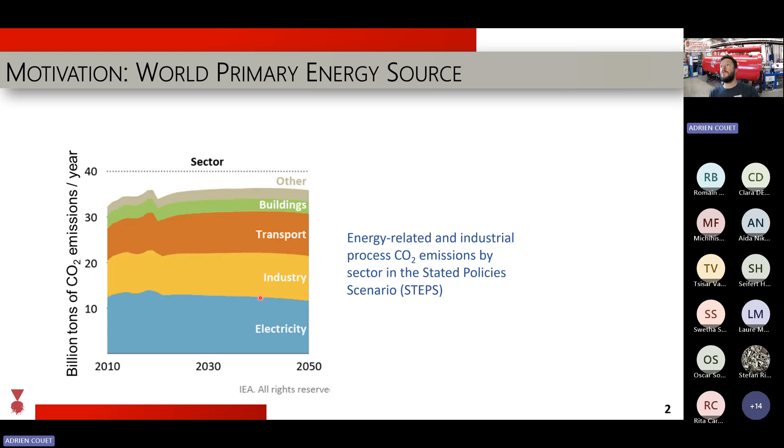With this, the problem is that if you look at electricity production in the world today, it does not seem to follow a decarbonization trend. Clearly the plans - again, this is an IEA report, it's a little older, this one is from 2018, so right before COVID - but honestly, this has not changed a lot.

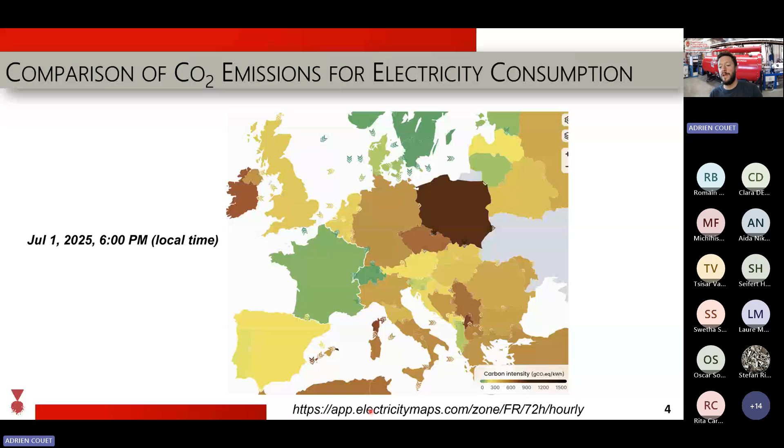If you look closely at France, for instance, France has a strong nuclear capacity. At 6 p.m. on July 1st, it was using about 2/3 of its capacity, about 40 gigawatts, a bit of solar, a bit of hydro. At the end of the day, the carbon intensity is extremely low - 93% is low carbon. That's a pretty good picture if you want to decarbonize electricity.

The neighbor Germany, at the same time, has no more nuclear. They have significant solar capacity - 100 gigawatts - and an extraordinary wind capacity of 70 gigawatts.

But at 6 p.m. that day, maybe the sun was already setting or something, because clearly not much of that capacity was being used. So coal and gas had to come up to take their part, which is why the carbon intensity is about an order of magnitude higher in Germany than in France.

And if you move a little further east to Poland, that's clearly an even more dire picture, where the carbon intensity is about double that of Germany.

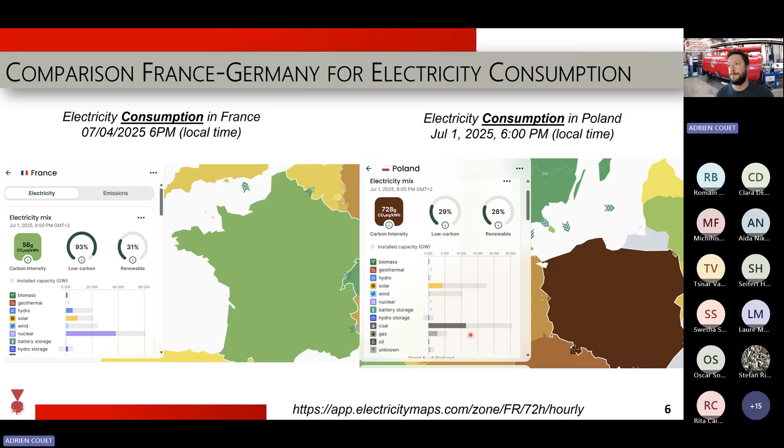The solar and the wind, again, probably the same weather as in Germany at this time. It was not used very much, and most of the electricity came from coal and gas. As a professor, I like to put grades, and that's more or less the grades of CO2 production for different countries in Europe.

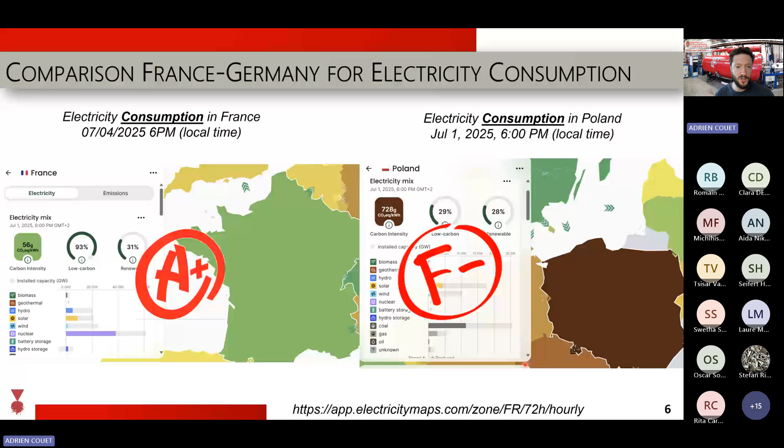So, how can we decarbonize electricity production? As I showed, nuclear is one of the paths, one of the really important means to do this.

If you look at the US over the past 10 years or so, this is a 2015 picture, taken from Third Way, a bipartisan lobby in Washington DC, you see we have an interest in using light water reactors. Those are going to be used for many decades. We're going to build new ones, whether in France, the US, and so on. New ones are being built and will be built because we know how that works, we know how to make them relatively efficient, and we have lots of experimental knowledge about those.

But they're also very expensive, and they may not fit every single country in the world. So small modular reactors are meant to be about 50 to 70 megawatts, and those can help smaller communities, smaller countries, or industries like mining to get energy on site, rather than relying on diesel generators.

And then, of course, there are those advanced reactors that we've probably heard about for many years by now, which are a little more than paper reactors today, thankfully. There are many companies and startups looking into those. While clearly this is not going to happen before 2030, there has been significant advancement globally on the design and development of those advanced nuclear reactors.

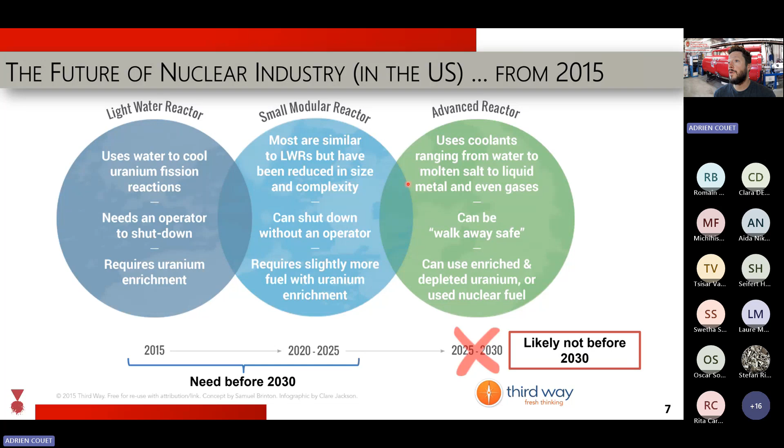All right, so let's take a look at the materials now. Materials are one of the main limitations to the development of those advanced nuclear technologies. This is a well-known plot, published in 2009, where you have temperature on the left-hand side and DPA. DPA is displacement damage, a means to quantify irradiation damage in materials.

If you look at 1 DPA, which seems relatively low on this scale, it means that every single atom in your material has moved on average 1 time from its lattice site, which is a lot when you think about it. If that really happened, the material would just vaporize and be blasted, nothing left. Thankfully, that's not what's happening in a reactor, because most of those defects, most atoms that have been displaced, go back to their original site or a similar site very quickly, so the defects don't have a very long lifetime. Thanks to this recombination of defects, you don't form a lot of defects and you don't vaporize your material just with 1 DPA.

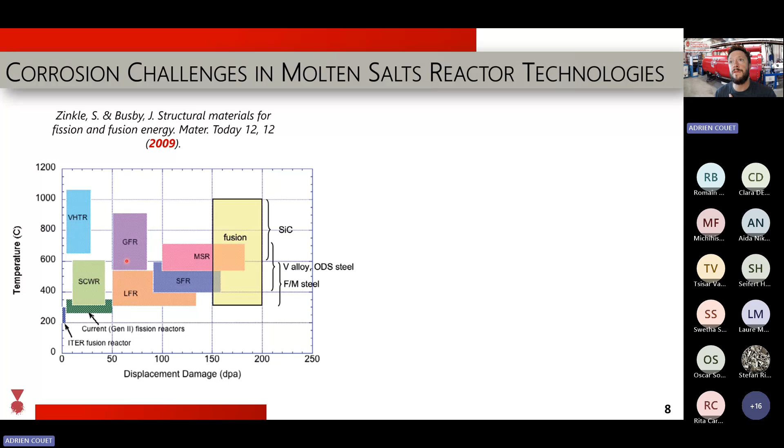So in this plot, you may recognize some acronyms. We are here interested in the molten salt reactor right there. But interestingly, you don't see corrosion in this plot. That's because only 10 years later, the same group of people realized that corrosion is another aspect, not only temperature and irradiation damage, that limits the deployment of materials for reactors. If you look at this relative corrosion susceptibility, it's very qualitative, but you realize that the molten salt reactor, in addition to the lead-fast reactor, are the two reactors with the most detrimental type of corrosion degradation out there.

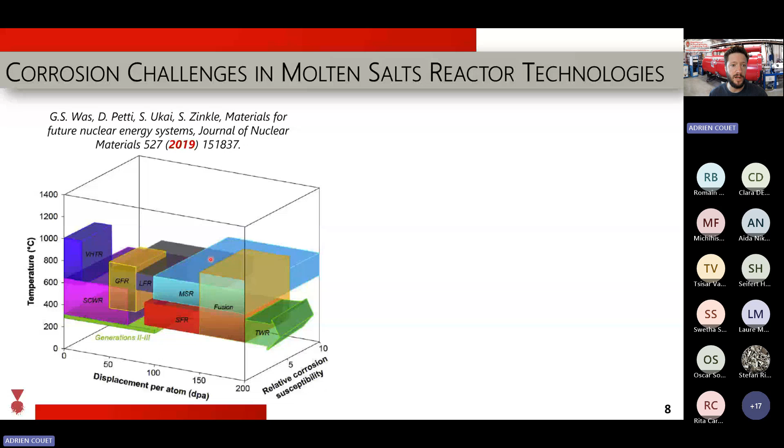If you want to develop a lead-fast reactor or molten salt reactor, you have to think about corrosion very, very seriously. Even though the people that developed those plots or graphs were professors at different universities, there are also big picture people out there, like Bill Gates, who is also aware that material science is one, if not the most, important challenge for advanced nuclear technologies.

Here is an MIT Q&A. It's a little old, but Bill Gates is still co-leading TerraPower, a company he helped fund a while ago, developing advanced nuclear technologies. Material science is one of the largest problems, according to him.

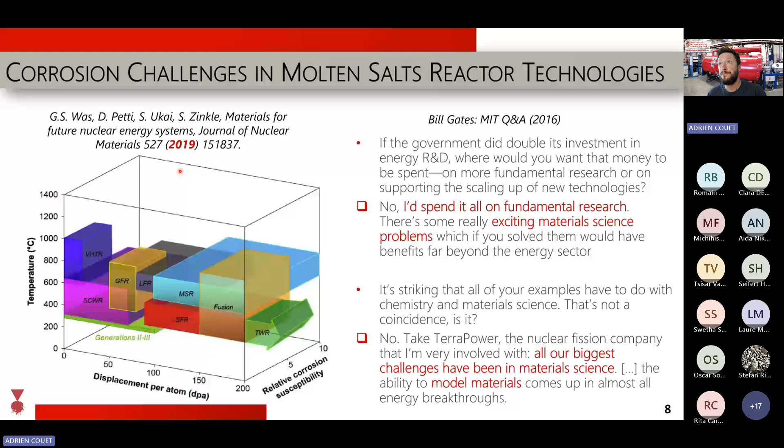All right, let's take a look at molten salt a little more closely, at how materials corrode in it. It's a thermodynamic process first, so you need a driving force for this to happen. For corrosion to happen, you need to look at two main physical quantities. One is the partial pressure of your alloying salt - fluorine or chlorine, denoted X here since it could be either. If this partial pressure of fluorine or chlorine in your salt is larger than the free energy of formation of your metal chloride or metal fluoride by a few tens of kilojoules per mole, then you will have this driving force leading to corrosion of your material.

How this usually happens is that ions in the salt react with your material to form metal chlorides, and since those dissolve in the salt, you form vacancies at the interface. Those vacancies can disappear either through surface roughness - increasing surface area and energy - or you inject vacancies into the material. If you inject vacancies, that means you have chemical transport: the vacancies diffuse via atoms, and those atoms diffuse in the opposite direction of the vacancies, so you end up with a depletion profile of your alloying element M in your system.

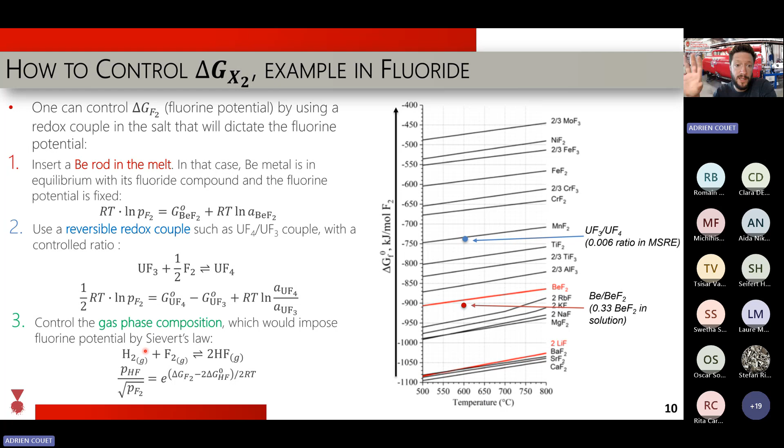Another way to do it, although not very much used in real applications, is to control the partial pressure of your gases in the overhead gas. If you do so, you can control the partial pressure of fluorine in the gas in equilibrium with the partial pressure of fluorine in the salt, achieving a redox condition again. So if you control the HF/H2 ratio in your overhead gas, you decide where you want this point to be, and you can be more or less oxidizing.

All right, so that's cool, but not very much, because that would be way too easy, right? Controlling this redox buffer is extremely complicated. If you're familiar with PWR or LWR corrosion, there are very strict redox potential boundaries for water. We inject hydrogen gas to very strict levels to control that redox, and even so, we have corrosion issues in the core of reactors out there. So even if you do the best you can with the chemistry, you're not going to get there, which means you need to develop materials to also sustain corrosion.

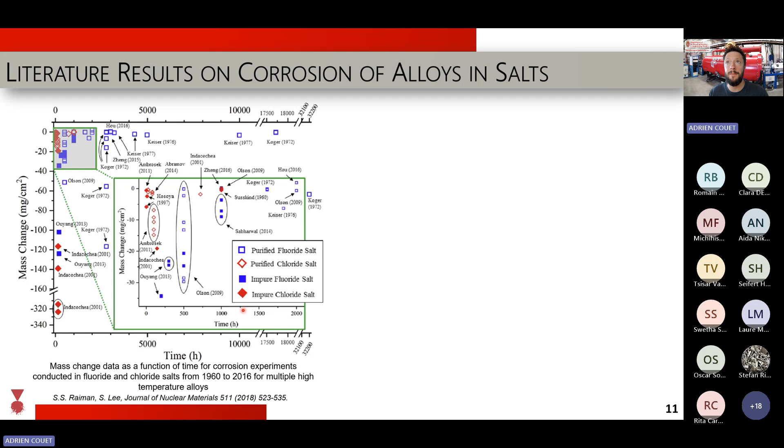Then you look at all the corrosion tests people have done in the literature. Here's a plot that shows mass loss, because your material dissolves in the salt, as a function of time, and you see this is all over the place - so many different data points everywhere. You can't really make anything out of this, right? So that's a bit of a problem, because that means you have a lot of 'mice in the house' - lots of issues here.

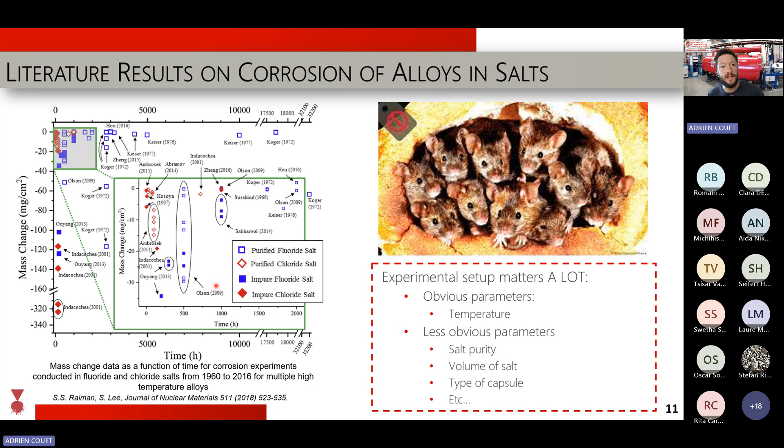Some of these issues are relatively obvious. In this plot, the temperature isn't always the same - there's some variation, but not a lot. Then there are other parameters, like salt purity, and so on. One thing you can see in this plot is that usually impure salt - the filled symbols - shows a higher weight loss than pure salt. So purity of the salt really matters.

First, HF will react with all the oxide particles in your salt - if you put HF in there, they're going to become fluorides, so the oxides decompose to fluoride. Then it's a question of reducing those fluorides. So you bubble H2 to reduce those fluorides to metal, and then you just have to sieve the salt to remove those metal particles, which have very low solubility in the salt.

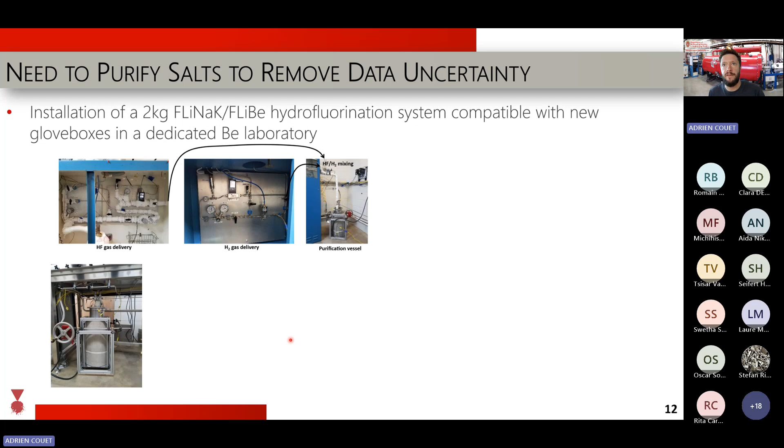So that works pretty well. Here's an example - you work in a glove box because salt loves water or oxygen, so you don't want any oxygen or water ingress in your environment, otherwise it gets very mushy and viscous, so you don't want that. What you see here is basically a 600 degree Celsius water-type thing - it looks like water, but it's very hot, and it behaves like water in terms of heat capacity and all that. It's relatively close, so it's super interesting for thermohydraulics to have a fluid that's like water but at 600 degrees Celsius and above.

So that's how you retrieve your salt from the purification vessel in a glove box.

We have more data now on this, and we have a paper in preparation to show the effect of purification on corrosion kinetics. For 316 stainless steel, we see approximately a factor of 2 lower weight loss when working with purified salt. So purification of salt is really very important.

The main impurity driving corrosion, as we found out, are oxygen-bearing impurities, mostly moisture, which could create HF in your salt as one of the responsible agents. So how does that look?

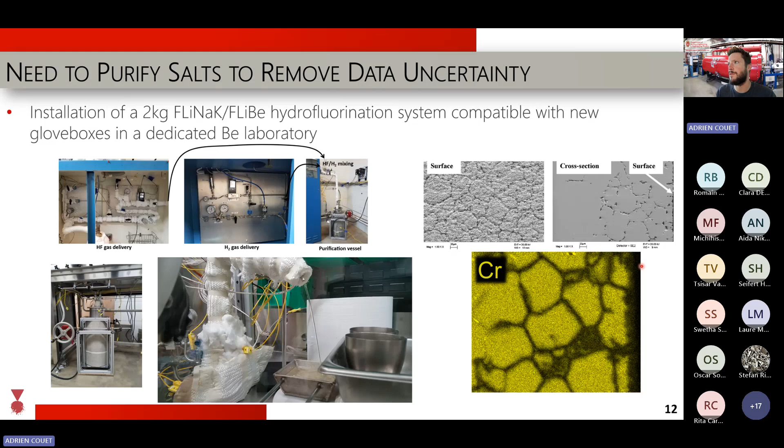Well, it's dissolution of chromium from the grain boundaries. It's a well-known effect—chromium fluoride is very stable, like chromium oxide, but it dissolves in the salt. So you have this dissolution path: you're losing chromium from the grain and grain boundaries, and you see weakening of the grain boundaries because of that. This is a well-known observation for chromium-bearing materials in molten salts.

Another thing we looked at briefly is galvanic corrosion. If we put very noble elements with a 316 stainless steel capsule around them, with electrical contact between them in the same media, we would expect the stainless steel to be severely oxidized, and the coupon of nickel, copper, and moly to be well protected against corrosion. If we put an insulator instead, we would expect galvanic corrosion not to occur.

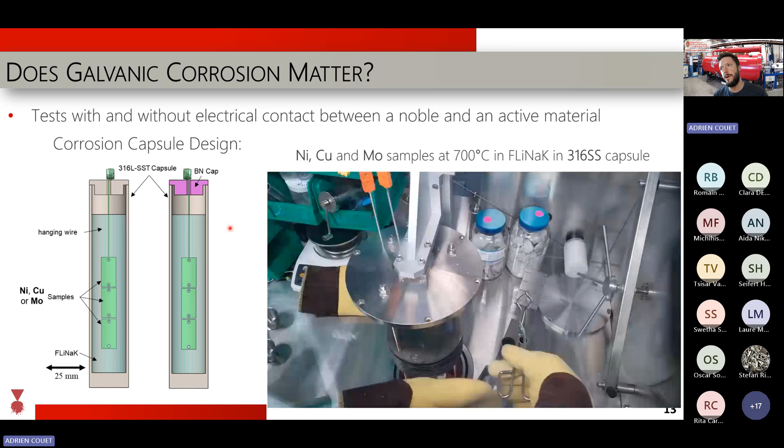So this is the kind of test we do. This is in a glove box—we have a well, a furnace around the well, and then we take those capsules out of the glove box. Here you can see the nitride caps preventing electrical contact, and the stainless steel caps that remain electrically connected.

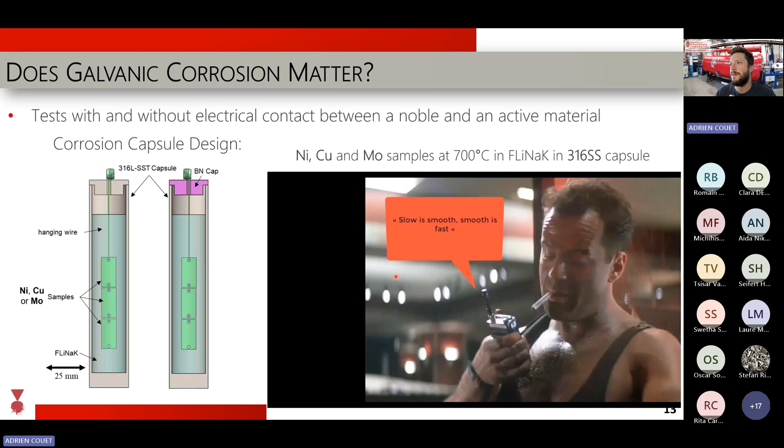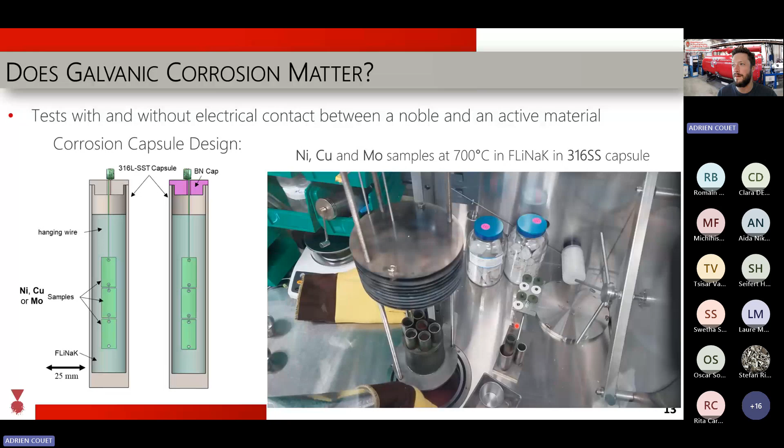So we take those samples out—it's very hot in there, about 700 degrees Celsius, so you've got to know what you're doing. The salt is still liquid, and we retrieve the salt to get its chemistry using ICP-MS afterwards.

You see the salt is a little blue here—there are corrosion products in it, and so on. So this is typically the type of test we do, and then we weigh the sample. We clean it up and weigh it to see how much material it has lost.

And surprisingly, in the experiment we see an increase of mass—we don't see a loss. That was a little surprising to us, especially nickel, which is supposed to be pretty inert, gained quite a bit of mass in this experiment. And clearly this is not something you would expect from galvanic corrosion.

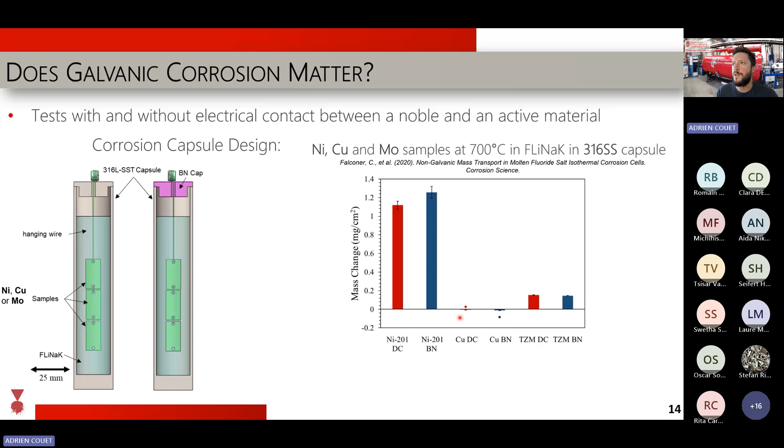When you look at direct contact (DC) versus boron nitride insulation (BN), you don't see much of a difference. Very little difference when using nickel, copper, or moly—TZM being about 99% moly. You don't see a difference between electrical contact and no electrical contact, and in most cases you see weight gain.

So what's going on? I won't go into detail—I invite you to read the papers at the bottom—but basically, we think galvanic corrosion has no effect. It's not something important at those high temperatures.

We think instead that there are activity gradients between the stainless steel and the samples. So you have dissolution of elements from the stainless steel into the salt, as expected. But those elements can then enter the sample material if they have a low enough activity there, like chromium in nickel—there's quite a bit of solubility of chromium into nickel and iron relative to 316 stainless steel. So chromium is essentially pumped by the nickel and ends up in the nickel, leading to weight gain in that nickel.

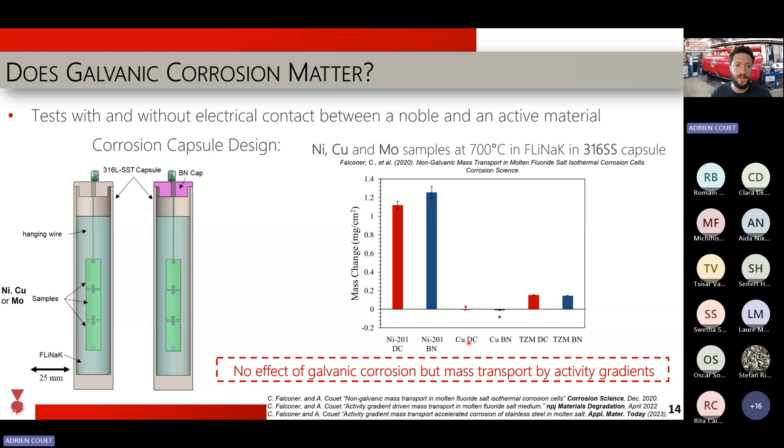So these are just a few experiments to show you what you have to be careful about. I would really encourage everyone to document as much as possible all of their experimental setup when working with molten salt.

Volume of salt, purity of the salt as much as you can, surface area of your sample, capsule being used, temperature, and so on. This is very important to report that for the community.

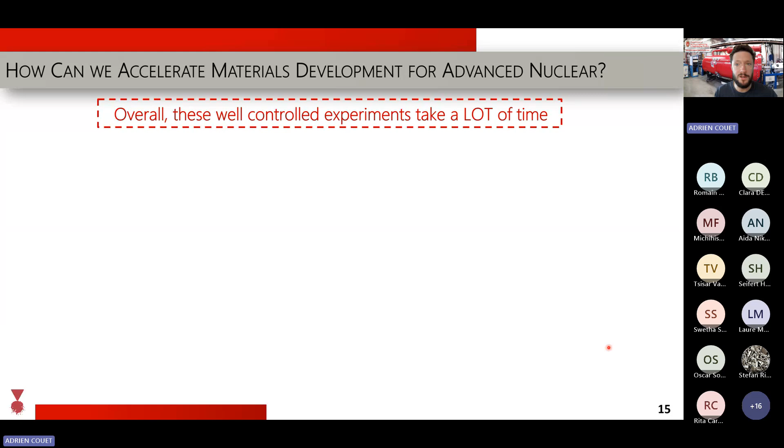But yeah, so those experiments, they took a PhD, right? PhD student Cody Falconer, who's now working at TerraPower, is an excellent PhD student, but it took him probably 4 or 5 years to do that purification and get those nice experiments being done and some modeling. It takes a lot of time, and that's the problem is we don't have time, right?

As I mentioned, here's an example. It's a plot I put together a few years ago where you see the development of materials for the aerospace industry, like the turbine engines, and the nuclear industry. Since approximately World War II, you see that the aerospace industry has developed materials about 5 degrees Celsius per year, and we're about half that pace for the nuclear industry.

So really, we're a little behind, about 50% of the pace of the aerospace industry. So we need to do better than that if we want to decarbonize electricity around the world. And for this, one of the things I started to look at a few years ago is the high-throughput data collection and analysis.

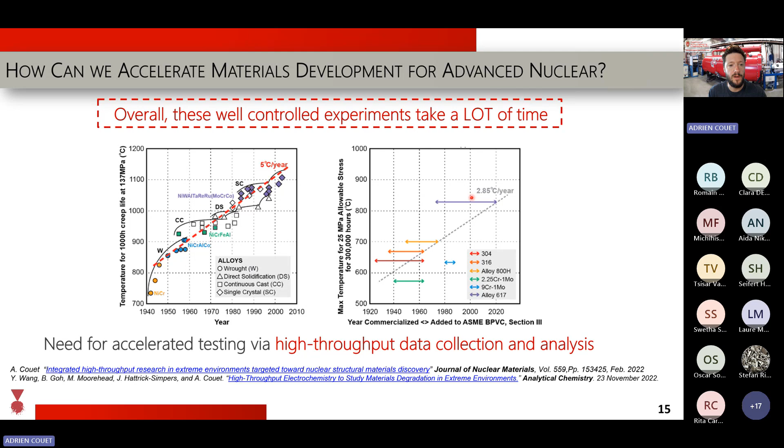So how can we accelerate the corrosion test? Well, so we came up with this framework, which is, okay, I don't need to only accelerate the test. I also need to accelerate the processing of the alloy. I need to accelerate the test. I need to accelerate the data collection.

And then I can use potentially some machine learning or artificial intelligence tool to kind of tell me, okay, looking at all the data that you have gathered, Adrien, here is what you should look at, right? So this is this kind of interesting framework that I will detail from now on in this talk.

And we're going to start with the alloy processing. So we are producing alloy using additive manufacturing because it's a very fast approach to produce metal parts of relatively well-controlled composition, relative to arc melting that can be relatively fast, but it's very labor intensive and also not as fast, of course, as additive manufacturing.

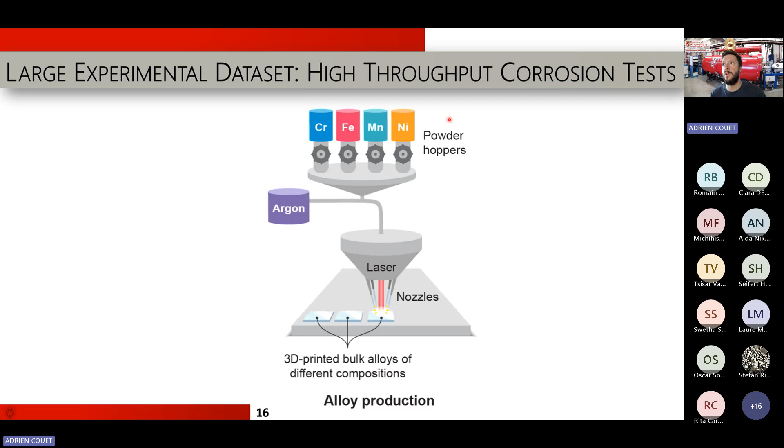So here is how we process. So we have this chromium, iron, manganese, nickel. Those are powder hoppers of single elements. We are, of course, looking at other powders, refractories, and so on more lately, but this is more like a case study to look at stainless steel-like elements, those 3D transition metals.

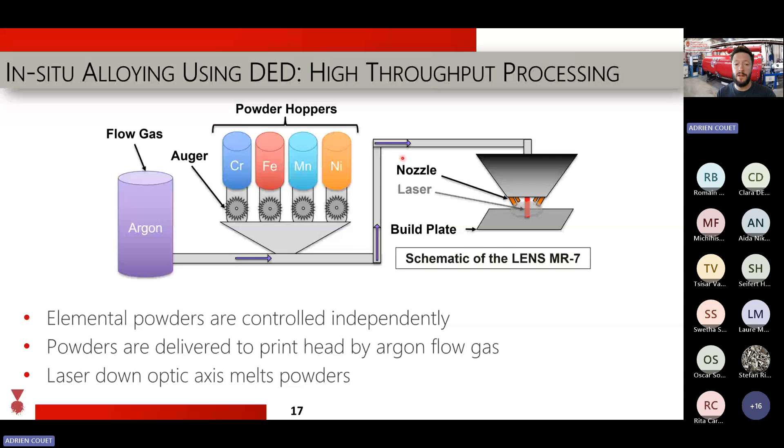And here is an example of how that works. So we use those powder hoppers. We flow the powders in our system, and we flow argon to carry the powder of a given composition. And then we blow the powder with nozzles in the focal point of a laser. The part then melts, right? And then we move the focal point for the parts to solidify, and we can melt above it, right? So we create this kind of part on a build plate.

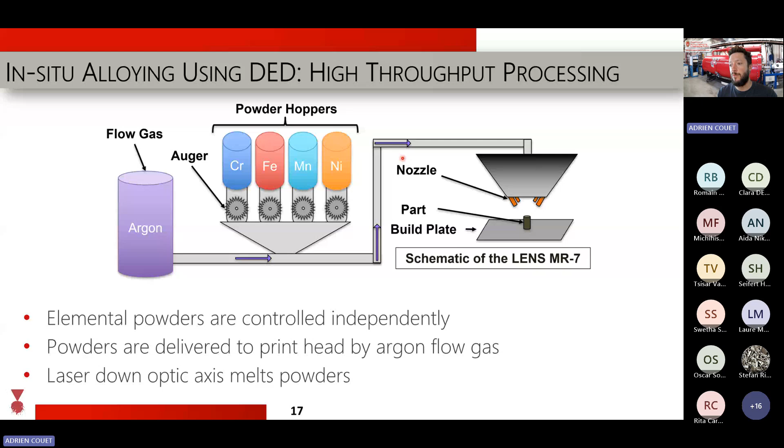So that works quite nicely, as you probably know. I mean, additive manufacturing is now a common thing out there. And we can, for instance, print small squares or small cubes like that.

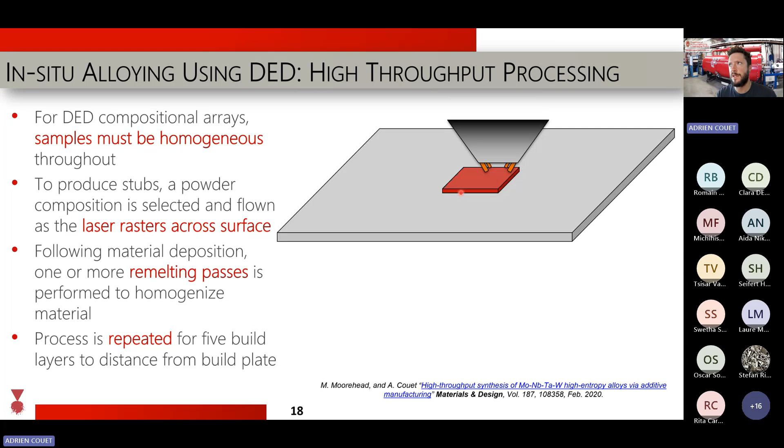One of the issues we can have is this: we don't necessarily melt everything because some powders have a higher melting point than others. So we tend to reglaze, as we say, or remelt using just a laser with no powder so that everything is melted. And then we do that again and again and again, and you build a few millimeters of a cube like that of a given composition, and you don't change the composition. And you end up with those plates. We call them Lego plates, where you have a build plate and you have your material on top.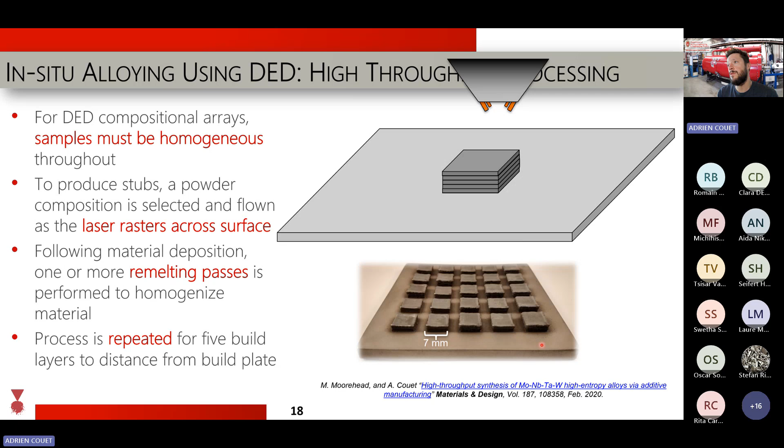And then what's cool about this is that you can really work on it on the plate, right? You have 25 alloys on your plate. You can homogenize them, polish them, test them if you want, all of that on the same plate.

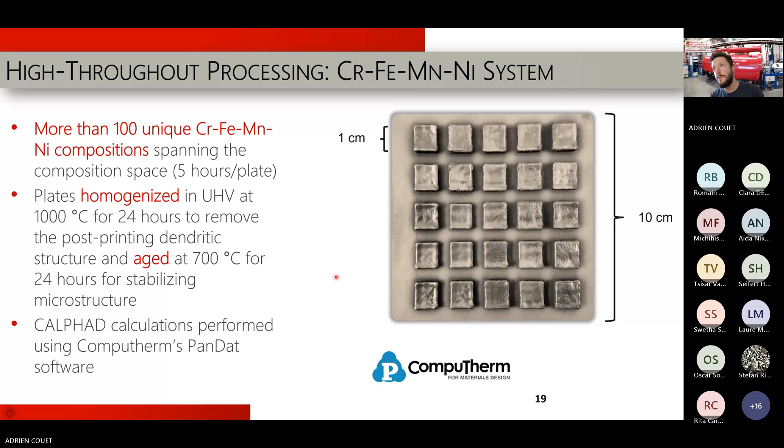So this can go quite fast. And so we put those plates in about 24 hours at 1,000 degrees Celsius to remove solidification structure from additive manufacturing, and then we thermal age them at 700 degrees Celsius to stabilize the microstructure at relatively high temperature for 24 hours. So then we use CalPhaD to kind of check, okay, what is the expected crystal structure out there? And we can also do XRD to check if those crystal structures are indeed the one we observe. So we have about 150 alloys we've produced in this tetrahedra here, and most of them are in the single phase with high nickel content, and because they are more printable and also high iron content.

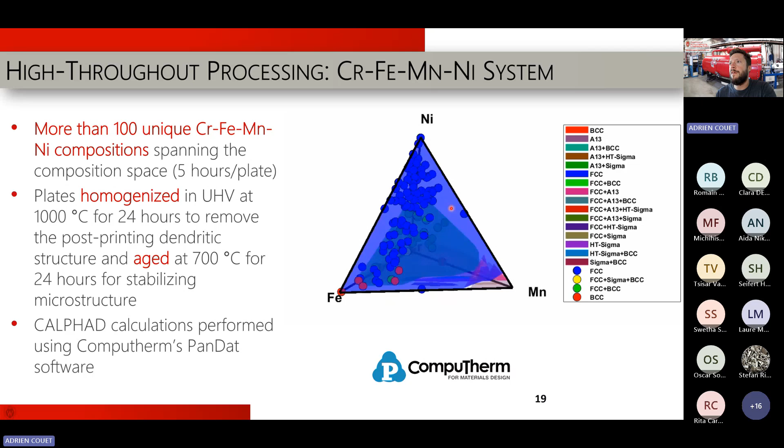You don't see much toward high chromium and high manganese because those parts don't print very well, right? But we have a single phase and also dual phase when you get closer to the chromium-rich area.

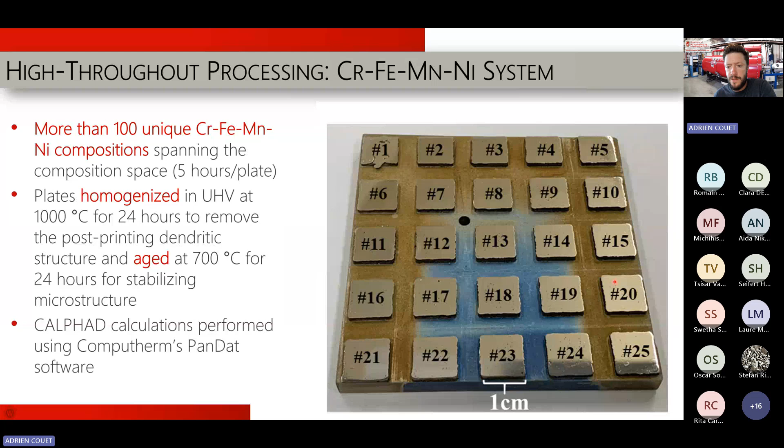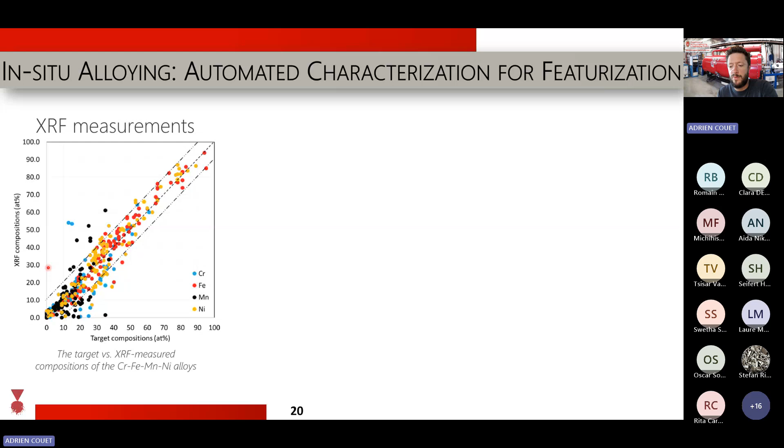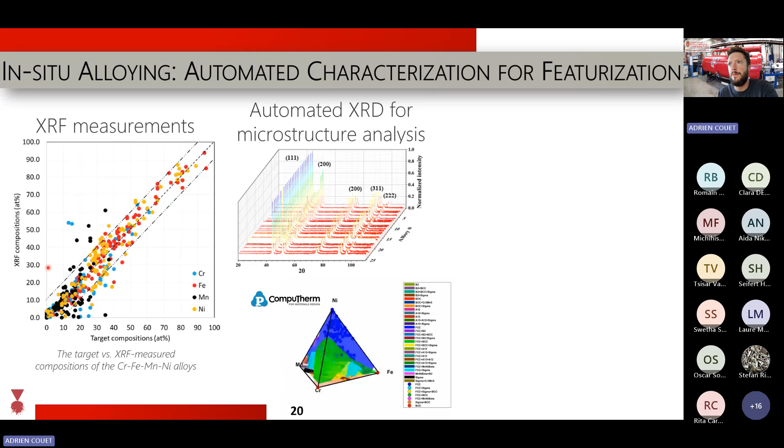We can use automated XRD to check the crystal structure. As I mentioned before, then we check relative to the predicted CALPHAD-based databases. And then we can also do SEM and EBSD to look at the crystal structure and the SEM-EDS.

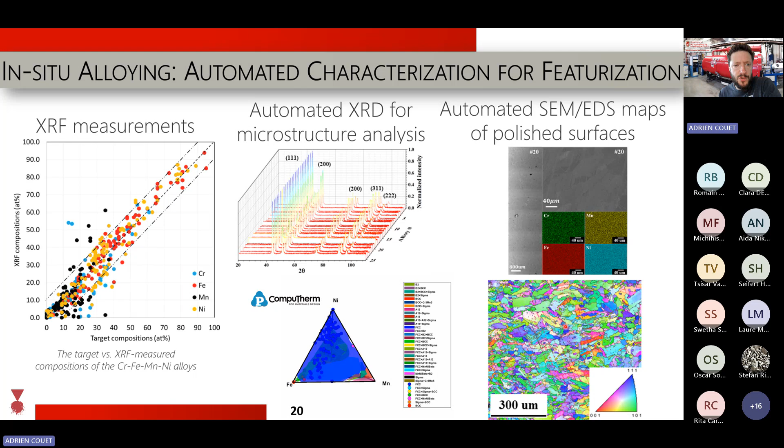One of the issues we have here with the crystal structure is you can see it's not really recrystallized. And that's one of the things we have to do a better job at - the heat treatment of our additively manufactured parts, especially when we go to refractories. We are just building a new furnace for this that can go to much higher temperature and can accommodate many samples, about 25 samples, so we can get a better recrystallized microstructure of our additively manufactured parts. So something to keep in mind.

Okay, so that's the production of the materials. Now I want to talk about the testing itself. So we use droplet tests.

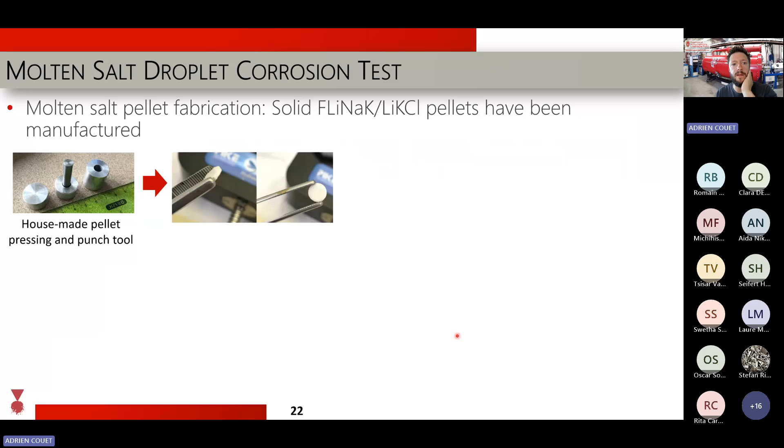So those droplets, it's relatively simple. We made this kind of punch tool and pressing tool to kind of create a little piece of chunk of salt that are always the same mass. They look like a drug pill a little bit. And then we kind of weigh them just to make sure that they have all the same mass and so on, and we can store them like that.

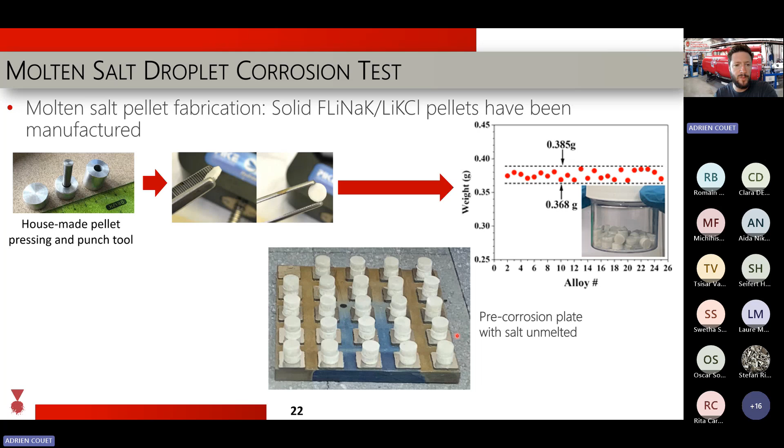So we have a heat plate in our glove box, and so we can put those droplets, those solid chunks of salt on top of our alloy. We close our heat plate, we heat it up to 500 degrees Celsius for about 100 hours, and then at the end we open the heat plate, and this is what we obtain when the test works, right?

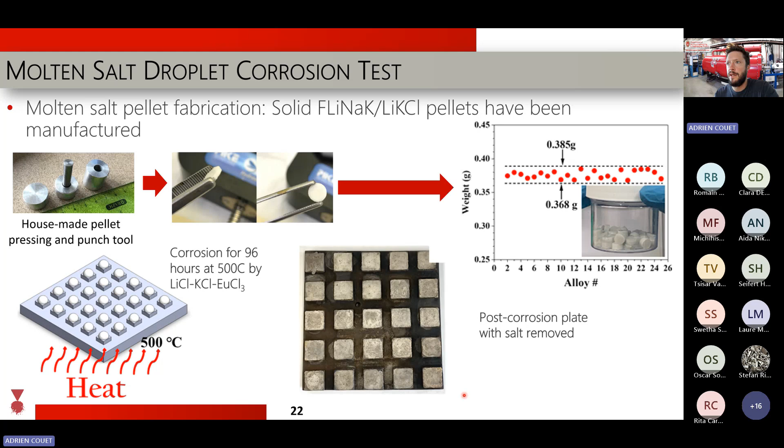So here is a beautiful case where the test has worked, where you see the droplet has remained on the sample very nicely, and you see some corrosion products that have built up. You can remove the salt, store it for analysis, and then you can clean up the surface and look at it after corrosion for each one of your alloy.

And this is before corrosion. So you see some polishing marks, right? And again, because we polish everything together, the polishing is not the best. But again, it's a high-throughput technique, so you're not going to get the super nice colloidal silica finish that you would get if you were to polish one or two samples together. But here you do 25 samples together. So it's different. You've got to decide a little bit about whether you want to go quick and it's not going to be as nice, or very, very precise high fidelity, but it's going to take a while.

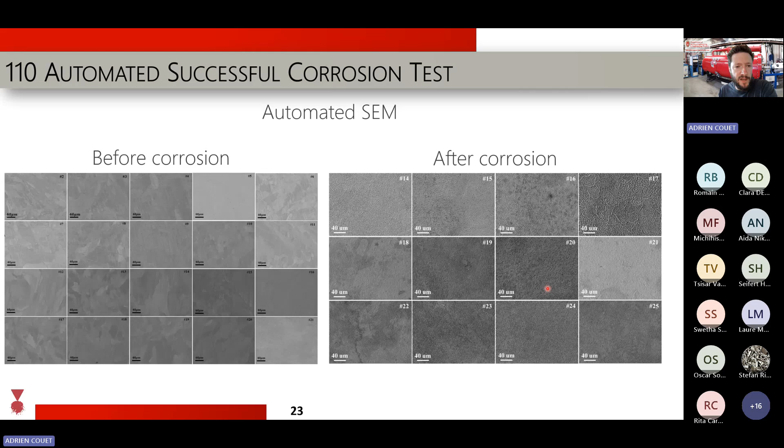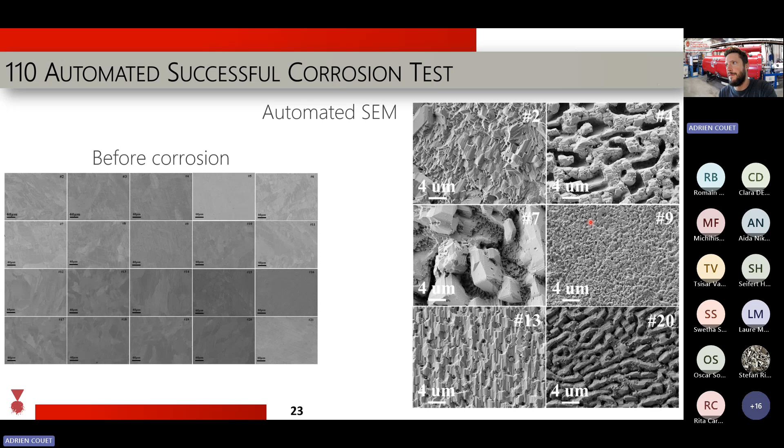And I guess we should do both, right? It's important to do both sides. But then after corrosion, you see this kind of feature that appears at the surface of the alloy. And if you look closely, you see very interesting patterns. So you have various patterns that are, of course, related to crystallography, but not only - if you look at the scale, this is way smaller than the grain size. And so we are wondering a little bit, what is actually leading to those interesting features that you observe, faceted versus maybe more ligament type of morphology.

So we use two different metrics of corrosion resistance. How do you characterize corrosion resistance? We used what's called glow discharge optical emission spectroscopy. We have one in the lab that allows us to really obtain depletion depths. So on the left here is your surface, and then you can get the concentration as a function of depth using this method. It's a very quick and powerful method to get very accurate values of your elements. And you see the depletion, for instance, of manganese for this alloy here, and you see the depletion of iron and manganese for this alloy here.

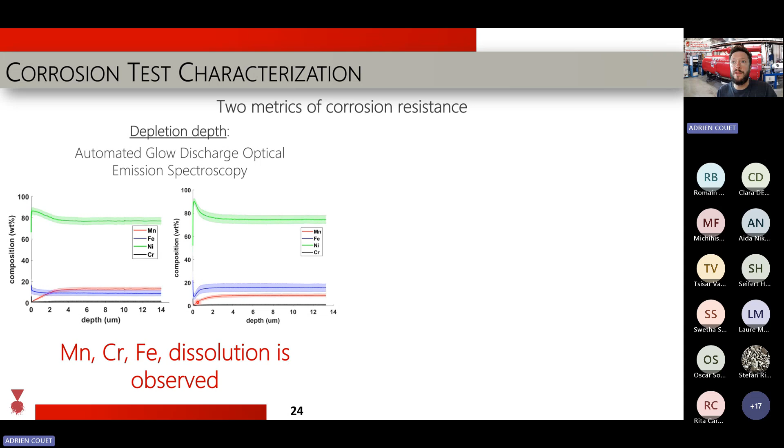So then you can look at the depletion depths, and you get a lot of data like that. At the bottom is the composition of your alloy - yellow is nickel, red is manganese, and iron. So all of your alloy composition is at the bottom, and on top is the depletion depth.

The issue with this method is that you can have an alloy that has a very small amount of an element but a very high depletion depth of this element. In the end, not much will be dissolved in the salt, even though you have a very high depletion depth. So this metric of corrosion was not working very well for us, even though we were learning interesting things. It was not a good one to transcribe for machine learning application.

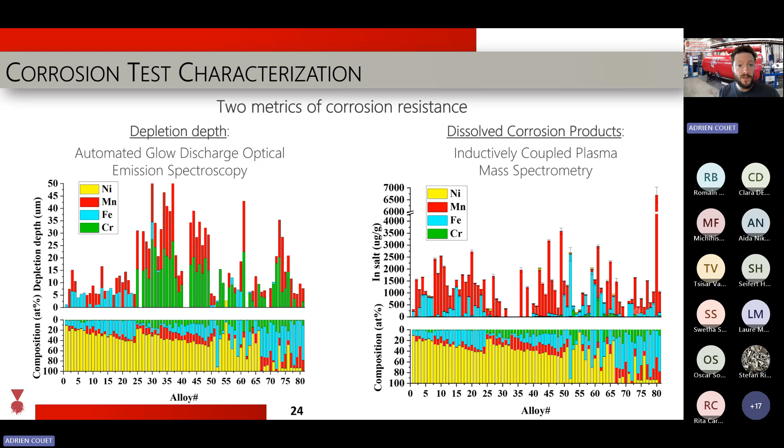So we decided to instead use the ICP-MS of the salt to look at the corrosion products in the salt. This is more like a holistic, general corrosion quantity that you can work with. You see how you have all the ppm of elements in the salt for those - this is about 82 tests. And those tests are the ones we've used for training the machine learning algorithm, which I'm going to talk about right now.

So the idea of the machine learning algorithm we use is a random forest regressor. We need to featurize our alloys, so we have a lot of different features - activity of elements within the alloy and so on. Then we have our output, which is corrosion products in the salt in terms of concentration from ICP-MS. So again, this is all the features we've used.

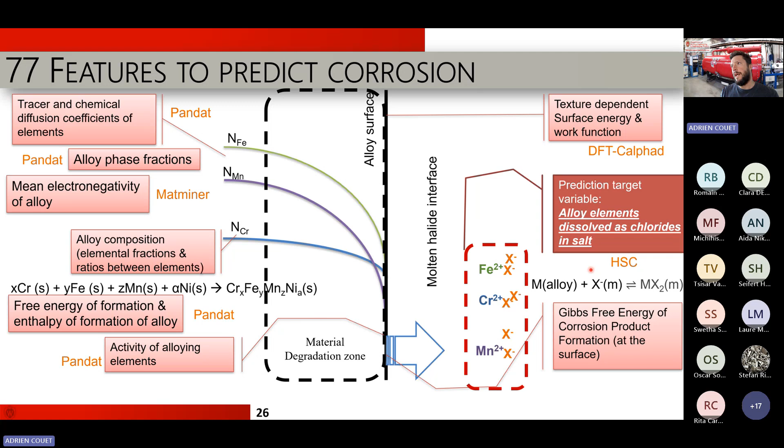I won't go through them in detail, but there were about 77 different features that we were able to extract from databases and from characterization to really describe our specific sample as much as possible. Each sample will be slightly different from one another, and the variable of interest is this alloying element in the salt.

We trained our machine learning algorithm using what's called a 5-fold cross-validation technique in the random forest regressor. Basically, what that means is that you're going to train your machine learning on 80% of the data, and test on the remaining 20%, and so on. You always train on a different set of data, and at the end it gets all the results together, and you can get the mean absolute error from your random forest regressor model.

We have an error of about 74%, which means if I give this machine learning algorithm an alloy, it should be capable of giving me, at 74% precision, the corrosion after 96 hours in that salt at this temperature. Most of our samples are below 50%, which is good - we don't have a lot of outliers, so that's a good sign.

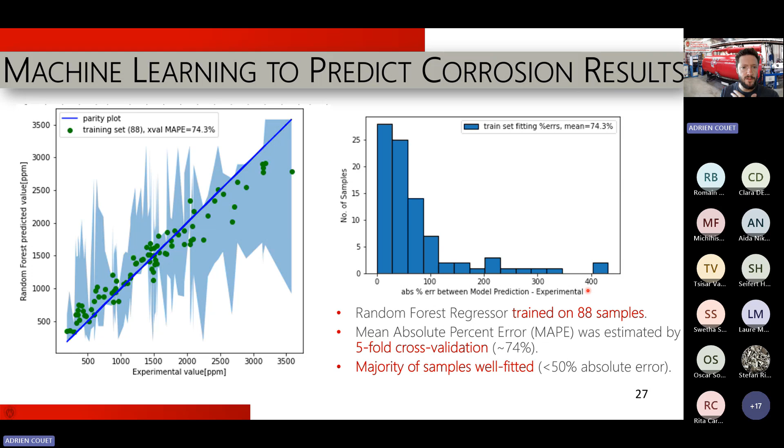Since we had more tests - about 110 alloys that worked pretty well - we were able to add 22 alloys that the machine learning has never seen. It's never been trained on them, not part of the 5-fold cross-validation.

Then those 22 were relatively well predicted, as you can see from this plot. Most of them were below 50% for sure error. And if you add those 22 alloys to the 88 alloys we had done before, you can also reduce the error of your machine learning algorithm down to about 58%.

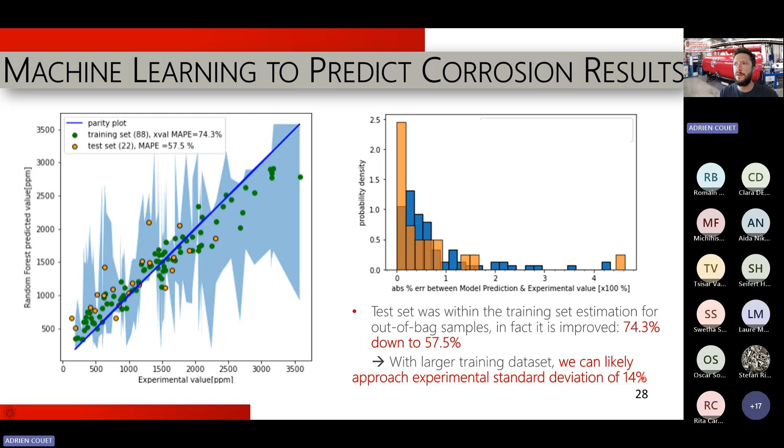When we did repeat tests of the same test to look at the experimental error of our results, it's about 15% or 14%. So we think that as you add more and more data, and we're working on that, you can get down to 15% error.

I'll pass on this one here, but now you can actually use the machine learning algorithm to predict corrosion of alloys that you have not tested. Here is the corrosion magnitude in terms of corrosion products in the salt that the random forest regressor is predicting. Not surprisingly, but that's a good thing, you see the higher manganese and the higher chromium tends to corrode more, or is predicted to corrode more.

On top here, you see this is the Hastelloy N, which is a nickel-based alloy that has been developed for molten salt. It's a projection of Hastelloy N because there is more than just those 4 elements. And then stainless steel 316 is down there.

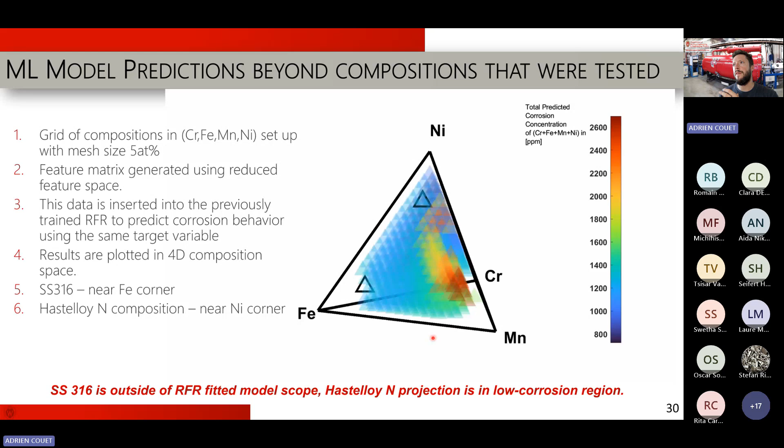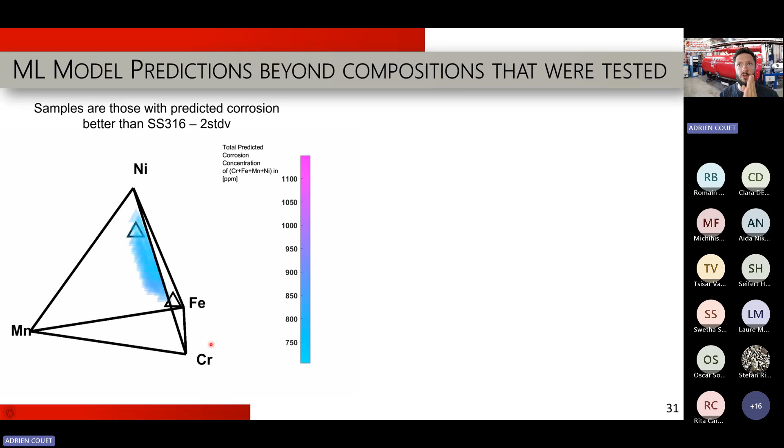The idea is, can I find alloys that are behaving better than stainless steel 316? So you see that the alloys behaving much better than 316 stainless steel are here in blue, 2 standard deviations better, and they're very low manganese, so we can almost consider them as a plane. We've projected them on our ternary diagram, and these elements are predicted to be better than stainless steel.

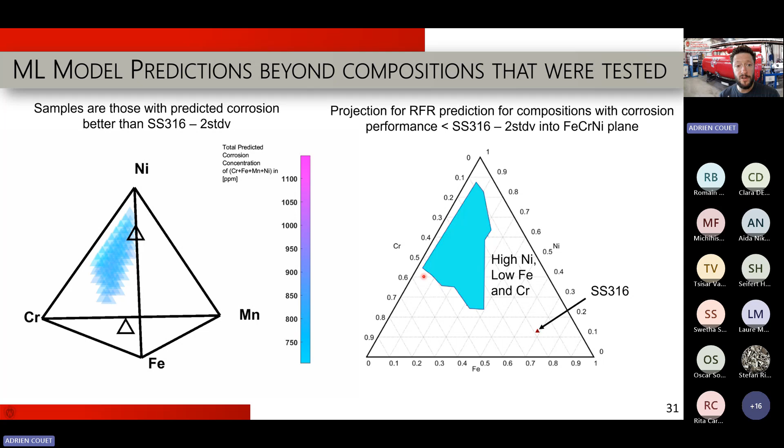It's interesting to see that some of them have relatively high chromium content. So chromium content itself is not a good descriptor of your propensity for corrosion. High nickel, relatively high chromium, may actually behave way better than stainless steel.

One other thing you can do with machine learning for molten salt is not only prediction, but interpretation. What's good with random forest is that it's not a black box. Random forest regressor, you can actually interpret the results. It's not maybe the most powerful machine learning algorithm out there, but it's interpretable.

So for that, first we need to reduce the number of features. We have 77 features, that's too much. Some of them are collinear to one another, monotonically interdependent, like activity and concentration, which are related physically to one another. So we need to reduce the number of features.

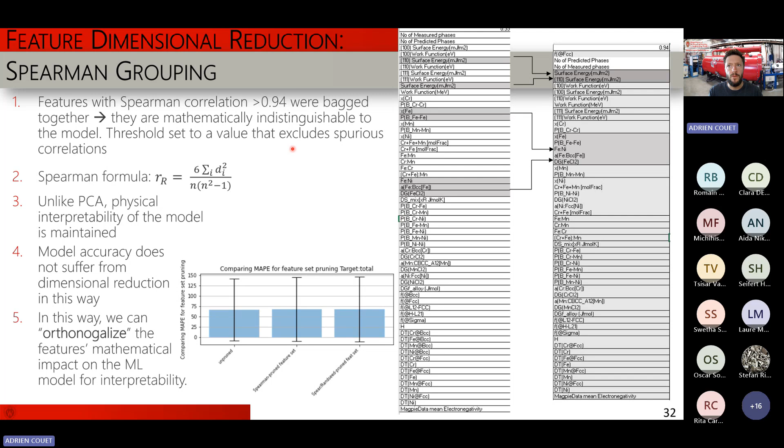For that, we use a technique called Spearman pruning that allows us to see which features follow the same monotonic behavior, so we can regroup them together into one feature. In other words, what we do is orthogonalize the matrix of features, so we have the most non-dependent features possible in our matrix for machine learning.

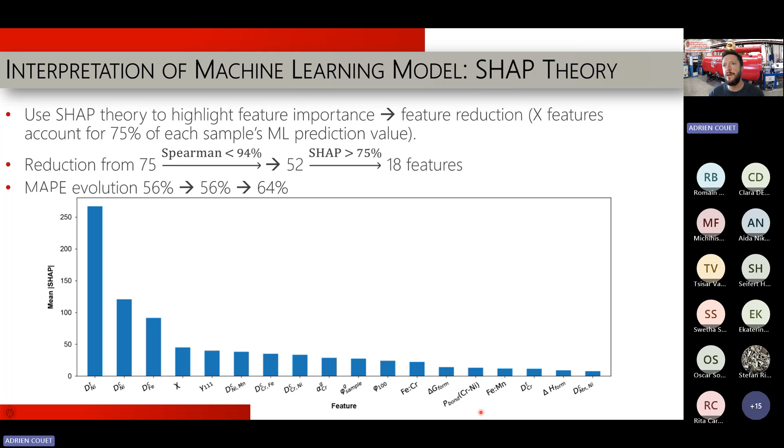With this, we can go from 75 to 18 features using Spearman pruning, and we only increase our error from 56 to 64%. So we lose very little accuracy by reducing the number of features by a lot. All the features are shown here at the bottom. I won't go into detail right away, but there are about 18 features that we've kept. So what do we do with those features?

There are two main plots that we put together, which you don't see out there a lot, but I think they're quite interesting to look at the results. This first one is relatively simple, it's to look at the distribution of the feature.

This here is the most important plot, showing the importance of each feature. When a feature value is high, it's red, and when low, it's blue. If corrosion is high, it's going to be at the exterior of this graph, and if corrosion is low, it's going to be at the interior.

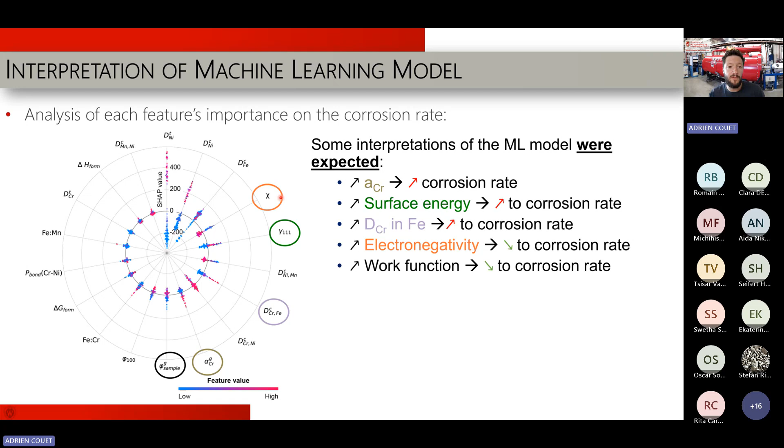When you have a high electronegativity of the material, it means it's very close to the electronegativity of the anions, so you have a lower corrosion rate - less of a driving force in this case. And when you have a high work function, it's very difficult to extract the electron for the corrosion to occur, so you have a low corrosion rate.

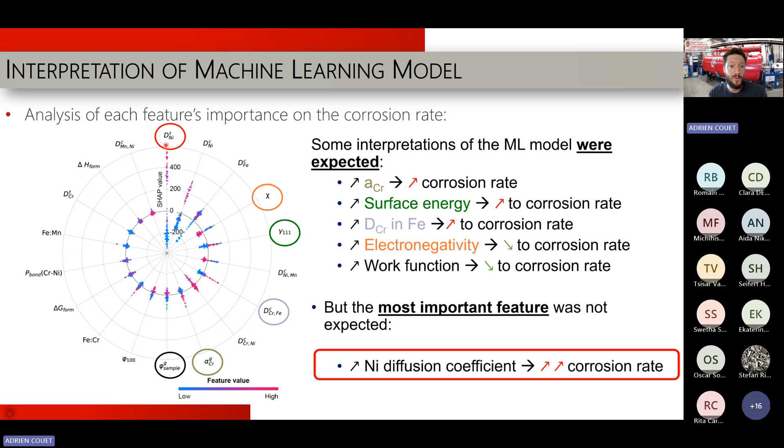But what's very interesting, the most important feature of all, is this diffusion of nickel that we didn't expect. We didn't expect that if you increase the diffusion coefficient of nickel, the corrosion rate will increase, because nickel is supposed to be noble. So we're trying to understand this. We think there's a relation to surface diffusion. We looked at the facets or morphology of the surface and noticed that for low nickel diffusion we tend to have more faceted features, while for high nickel diffusion we tend to see more ligament morphology. So potentially the nickel diffusion is playing a role on the surface morphology that is then connected to the corrosion rate of the alloy.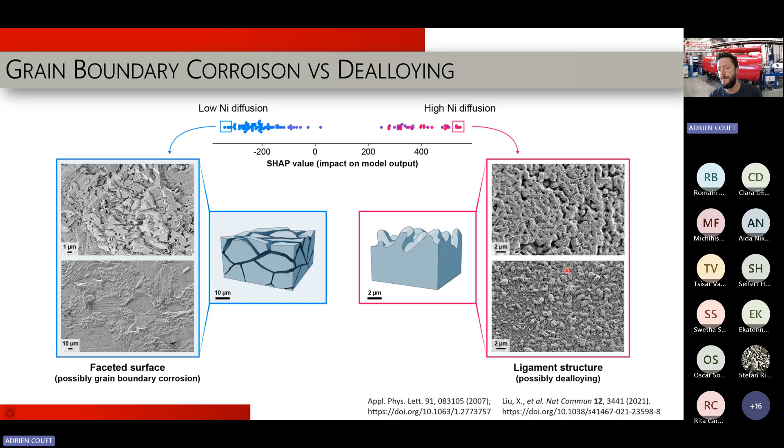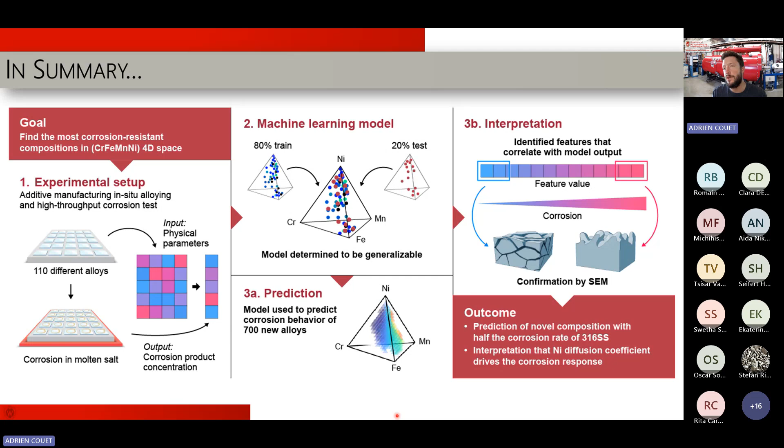All right, just to finish, to show you the overall progress here - this is a paper we published in Matter, so I invite you to look at this. It's open access. And just three more slides to go beyond this, about what we're doing.

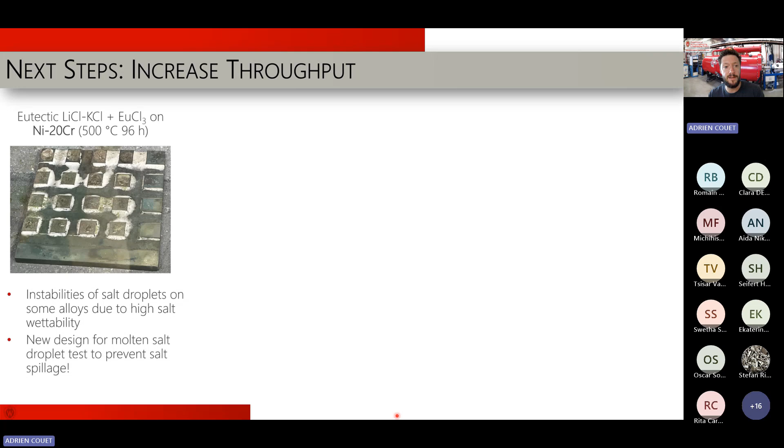The truth is not all the tests are very successful. We have tests that fail tremendously and terribly when the droplet basically just spills and disappears. That happens a lot when we're working on nickel-rich elements, especially nickel binary chrome. We think that's because it's very wettable - there is good wettability, and then the droplet spills like that. So we want to make a more robust corrosion test for these high-throughput experiments.

So we tested a few things - for instance, putting some boundaries made of quartz around the sample, and then boron nitride paste to prevent the salt from spilling. Here is an example of one of those droplets melting inside the quartz, with the alloy on the bottom, and you can see the boron nitride paste on the side. It looks pretty good, up to a point where it's actually going to leak.

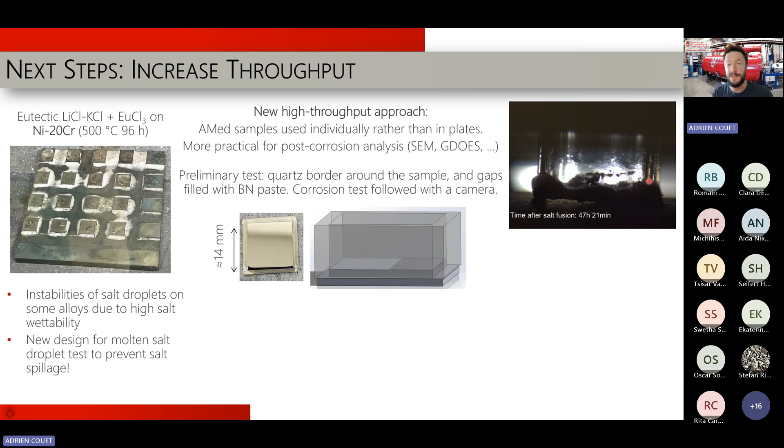Unfortunately, after about 8 hours, we often see that boron nitride paste deteriorate, and you're losing the salt. This is the work we are actually doing with the CEA in France at the moment, and you see this interesting behavior where the salt just went out of the quartz, and now it's gone. So we are trying to use a better experiment, maybe now using a cap and a better seal to prevent the salt from spilling.

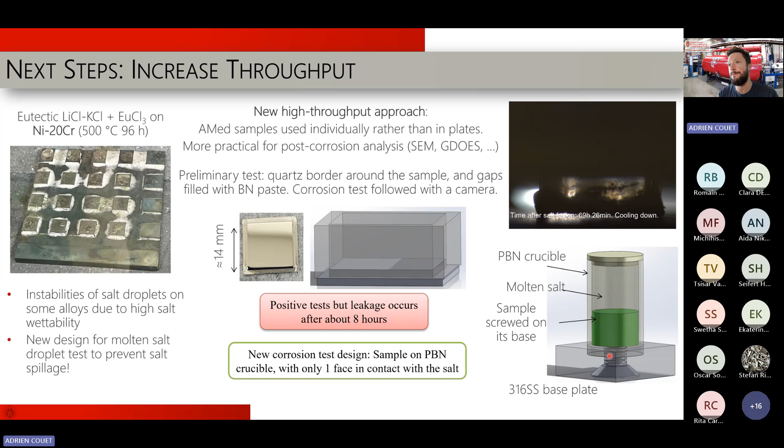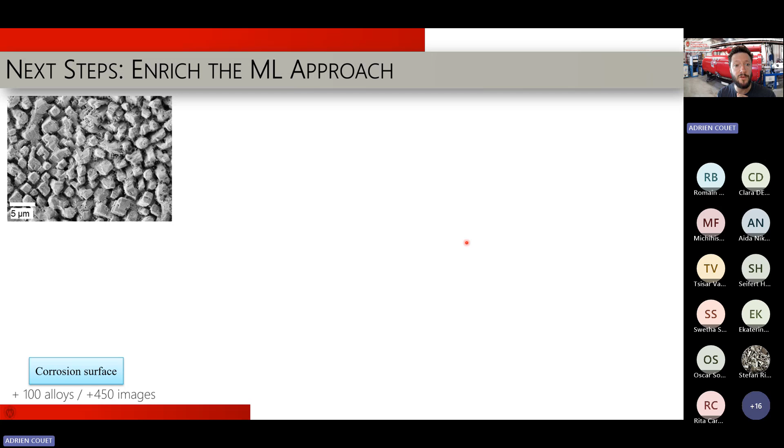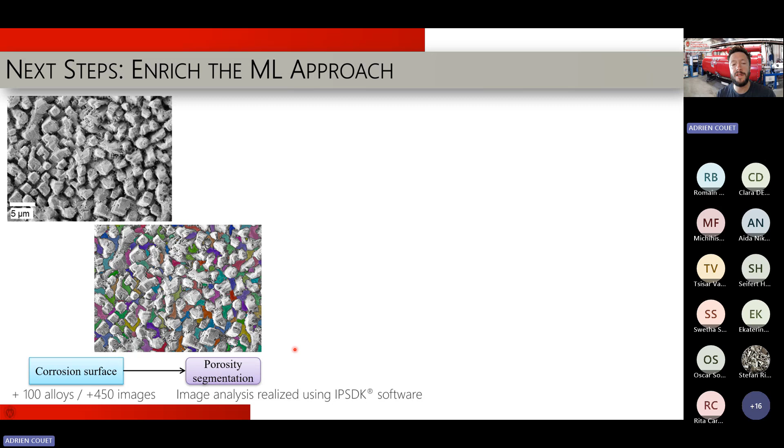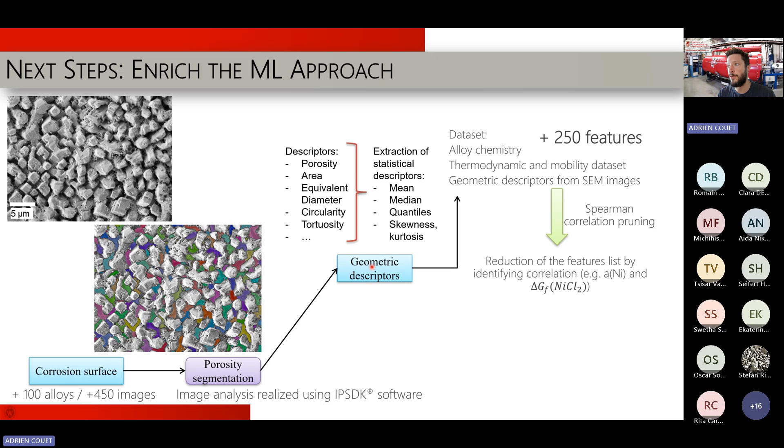The last slide here is we're also looking at doing machine learning on the facets, or the morphology of the surface. We can use computer vision aided software, machine learning based, to extract the porosity from these images. That helps us get more descriptors, more features - we have much more features than just the 75 I talked to you about, now more than 250 features. So we can really enrich our machine learning random forest regressor. We also want to use Spearman correlation pruning, and at the end arrive at using the morphology of the images to better inform if it's related to the corrosion rate, as I mentioned earlier.

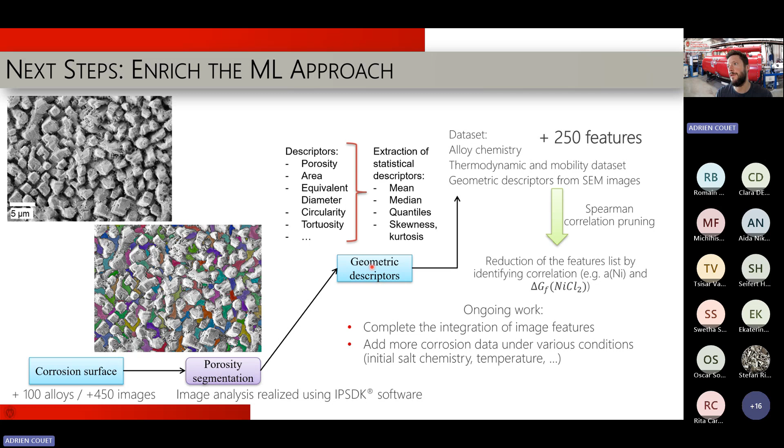I'll stop here, and I thank you for your attention. And of course, we have time for questions, so feel free to ask anything you want. Thank you.

Thank you very much, it was very interesting. I think I've seen for the very first time liquid salt, like in your video. So Stefan, you can melt some salt in your pot in the kitchen - that works too, but I never did so far.

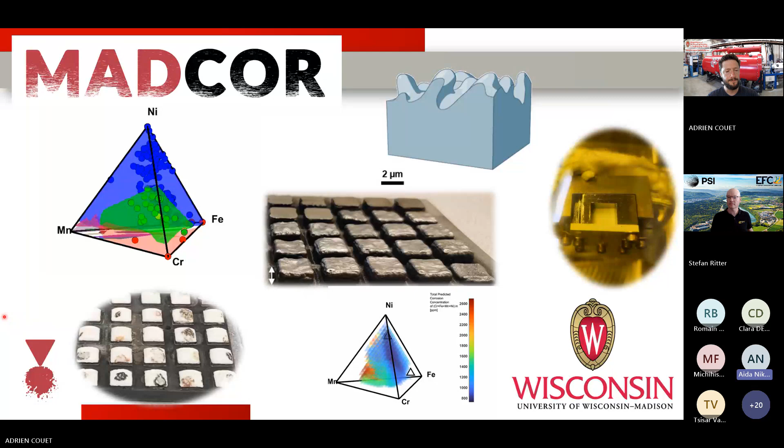Yes. Okay, thank you for your nice presentation and the nice work you presented. So I was wondering, on slide 10, or pretty much towards the beginning, if I'm not mistaken, about that delta G diagram you showed for different metal fluorides forming. Yeah.

Because afterwards you mentioned also impurity oxygen and HF in your system, but with that diagram, are we considering that F2 is your oxidizing agent, or is it just a way to consider the affinities of different metal fluorides being formed?

Yeah, that's a very good question. You're right that in this Ellingham diagram, we are of course considering that the half cell reaction is F2/F minus. That's the way you would do it. On the other end, as I've mentioned, the impurities are actually responsible for corrosion. So it's not F2/F minus that's necessarily the agent responsible for the oxidizing reaction.

What's important is that those impurities mostly change the redox of your salt, relative to the F2/F minus reaction. So the redox of your salt at the end of the day is your metric or probe to see how oxidizing your salt is. It's not that you don't care, but at this level you don't really care what is the oxidizing agent. You just want to know where the redox potential of your salt is, whether it's impurities or some intrinsic property making it oxidizing. You just want a redox that is relatively reducing towards your element. And in that case, using the Ellingham diagram is very powerful.

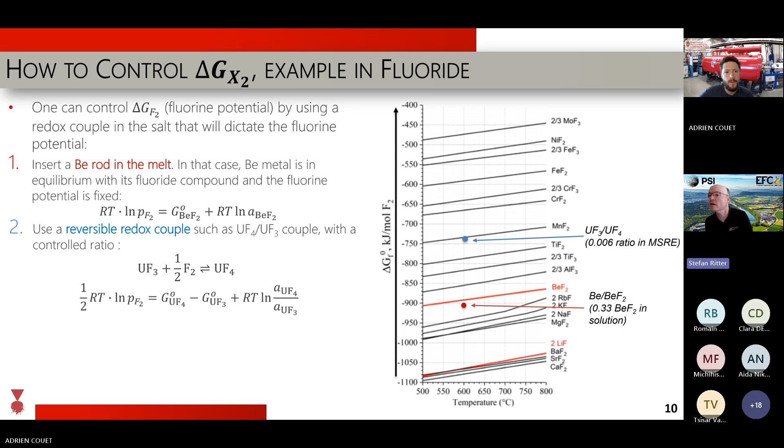Just a small remark. Why not manufacture by additive manufacturing small crucibles, small cups, to prevent flow of the droplets, instead of plates? Yeah, that's an excellent question.

So the idea, since with additive manufacturing you have some freedom in the geometry of what you want to print, we could actually print small crucibles and the droplet won't spill. The issue with that, though, there are two main problems. The first is it's very difficult to prepare the surface of the material, because if you have the crucible, you don't really have nice access to the surface to polish it using standard auto polishing procedures. You can use other types of procedures, but they're not as well developed as the regular colloidal silica, diamond paste, and so on. So it's a little difficult to have very nice surface polishing. It's also a little tricky to control the surface area very well, because you want the same surface area to react.

Using, for instance, we couldn't have used GDOES in this case, because now you don't have a planar surface. So GDOES we couldn't have used. ICP-MS, most likely we could have been able to use that. So it's a possibility, but it's not as simple as it seems, and at the end may create more hurdles than we would like. So we looked into that, and we decided not to go in this direction, but it's certainly something people could look into if they have the means and capabilities.